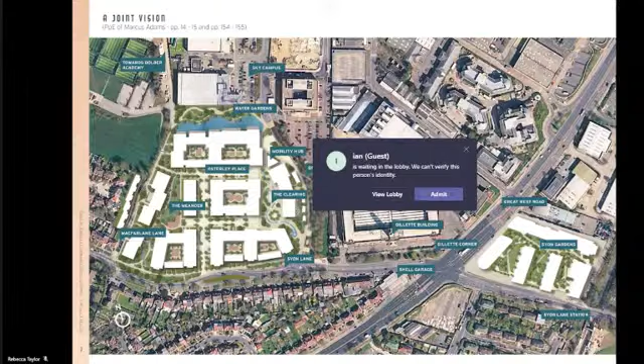I think it's in this slide where you can see the Homebase site outlined in blue and the Tesco site outlined in red. You can see its location. Rightly so, there's been much emphasis given to its relationship to Osterley Park in the northwest, and to Syon Park and Kew Gardens in the southeast. But what you will also see very clearly is the role of the Great West Corridor.

There's a real stark transformation from the finer grain homes to the west to the larger footprint buildings of the Great West Corridor to the north and northeast. That includes the Sky Campus, a significant area immediately to the north of the site, with over 7,500 employees, and the Bolder Academy, a recently opened school, again immediately to the north of the site. As we'll hear later, that area, the Great West Road, is part of the Great West Corridor Master Plan, an opportunity area providing 7,500 new homes and 14,000 new jobs.

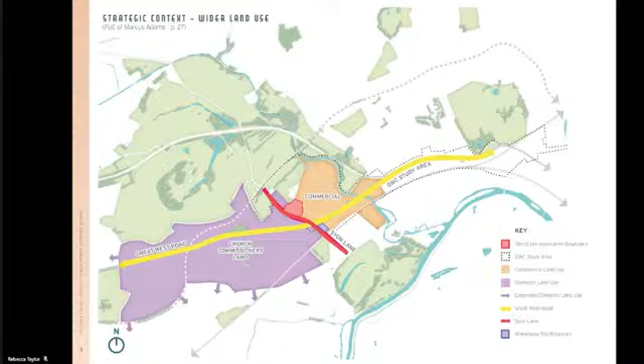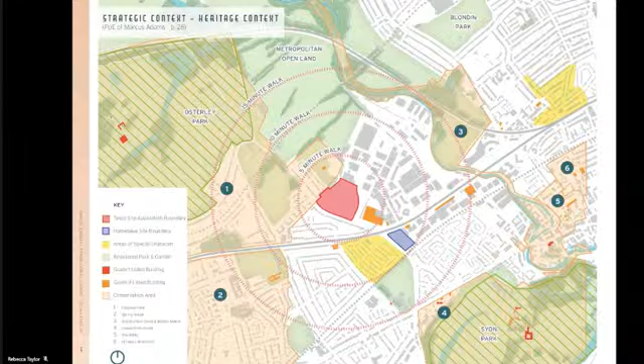Next one, please. As we zoom in, particular focus is on the four edges of the Tesco site: the northern edge to the Sky campus, the eastern edge to Grant Way, the southern edge to Syon Lane, and the western edge to McFarlane Lane and Oaklands Avenue. What's unique is that they're all very, very different relationships.

To the north, we have the Water Gardens, an area largely forgotten and hidden behind the rear of the Tesco store and the boundary of the Sky campus. To the east on Grant Way, we have a route that provides vehicular and pedestrian access from Syon Lane to the Sky campus, and ultimately for Sky employees going from Syon Lane station to the Sky campus.

It's a street that's quite green, with existing trees, not particularly overlooked, and very much a vehicle dominated environment, but that links you up to the Sky campus. On the northern side to the Water Gardens is a fence that runs along the northern boundary and the full extent of the western boundary to McFarlane Lane. That combination of fences on the north and west means connectivity between the metropolitan open land and open space to the northwest is a barrier to pedestrian movement between local facilities and assets.

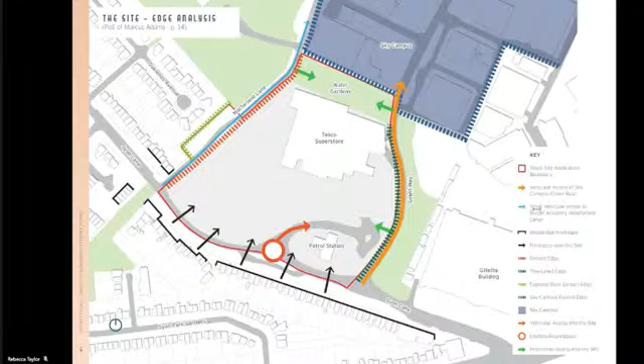I'll just move on now to some photographs - you'll see this on your site visit, but it's worth looking at these in context. The top left slide shows the Tesco store, a view looking north. You can see the Sky campus in the background there.

The next view, number 2, shows the vast area of surface car parking with the Tesco store to the left and the clock tower of the Gillette building on the skyline in the distance. The third view shows the car-dominated environment, with the petrol filling station to the right, which fronts onto Syon Lane.

Image 4 gives you that feeling of McFarlane Lane I talked about - the fenced-in route up to the Bolder Academy. To the right of that, number 5, shows the Water Gardens as they exist today, bordering onto the Sky campus.

Number 6 shows that view further along. We see the Water Gardens have real potential to make quite a special space as part of this plan, utilising what is currently another area of underutilised space.

Slide 7 shows the vehicle access into Grant Way, which is also used for pedestrians accessing the Sky Campus, and you can see some of the mature planting that exists on the left-hand side.

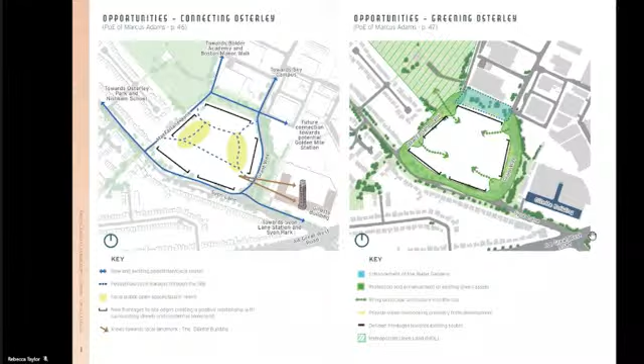And then the image on the right is about greening. As I said in the introduction, this project is not just about buildings, but about the spaces in between. The landscape-led approach started with this idea of a green halo, a green envelope to the scheme, linking up all the existing green assets, whether south on Syon Lane, the greenery on Grant Way, the water gardens, or McFarlane Lane and its link towards the MOL in the northwest corner. Combining that with the idea of pedestrian routes gives a green edge to this new neighbourhood.

In also dealing with constraints, there are a number, as you'd imagine on sites like this. The grey circles represent areas where height has to respect neighbours, and I'll explain how we do that - particularly along the boundary to McFarlane Lane, the area that sits within the conservation area, and backing onto Oaklands Drive, and the relationship to the south, to Syon Lane - those two particular areas, the south and the west.

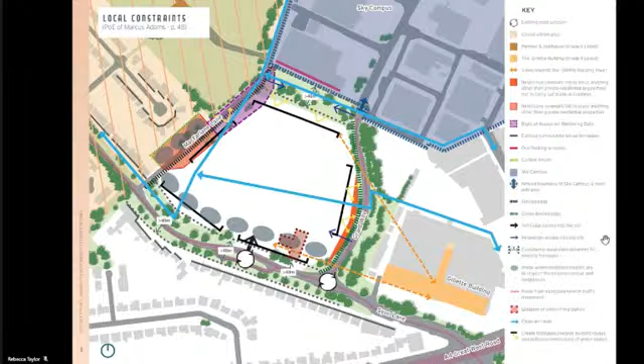We've also got the blue lines, which are the clean air routes as part of the wider connectivity of the Great West Corridor Master Plan. And we've got rights of access for retrieving balls, in the purple area in the northwest corner. So as you'd imagine on a site like this, a whole range of different constraints, and also the role of the Gillette building, particularly the clock tower, in providing legibility on that route from Sky Campus through to Syon Lane Station.

While focusing local, we also need, and we're fully aware as part of this design process, of the importance of strategic views, particularly from those wider heritage assets. This is an extract from the Great West Corridor Local Plan, November 2020, showing some of those views identified in that document.

Further, we agreed a whole range of LVIAs - actually these were agreed prior to our appointment, back in October 2019, with London Borough of Hounslow identifying a range of views to be considered as part of this application, particularly with reference to this Tesco site's relationship to Syon Park and to Osterley Park.

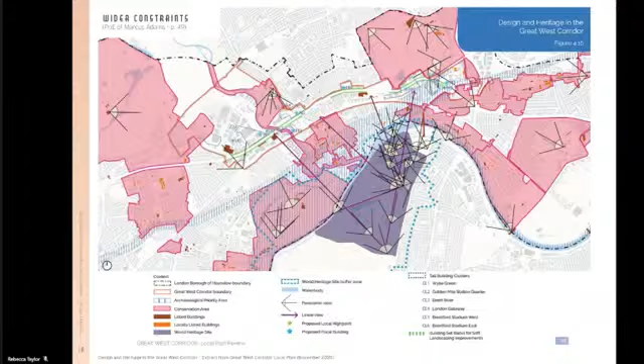For us, this project, in the creation of a new neighbourhood, is about placemaking - places that are people focused, that provide a quality place to live, and that's a driver for how we approach projects. So I'll take you quickly through this sequence of nine slides.

We start with number one, which is protecting and enhancing those local assets, and in particular we draw reference to the green perimeter and the water gardens.

In number two, we established the new connections - this idea of pedestrian routes coming in on the four corners, creating a network of streets, footways, and public realm that allows this new neighbourhood to knit and connect into its surroundings, utilising current opportunities and future-proofing for ones that may potentially occur.

We then created two new public spaces, which I'll describe further later - the clearing in red and the meander in green. We see this as a pedestrian dominated environment, limiting vehicle access to really the existing access to the south of Syon Lane, and generally our streets are green streets, walkable streets, with limited accessibility and servicing.

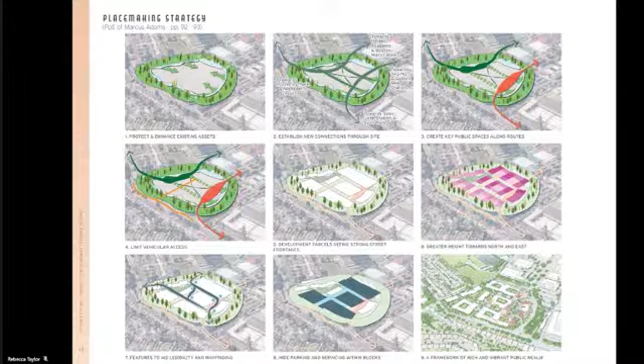I'll explain on the next slide, where you'll see the framework of what we imagine will be a vibrant and interesting public realm. Next slide, please.

This aerial view concentrates on the idea of the clearing. We've got our three public spaces: the clearing to the east, the water gardens to the north, and the meander to the west. We see the idea of this new space.

As I've described, it's on the pedestrian route from Sky Campus to Syon Lane Station and the neighbourhoods to the south, but also from the Bolder Academy in the north and northwest. These routes lead you to this new public space.

We heard in the introduction on Tuesday about the provision of local facilities and local uses, and here we've got the opportunity, as set out in our key, to provide a whole range of mixed uses, which could potentially include pharmacies, GPs, and community halls. We really see this as a neighbourhood, a local heart, a local hub, providing this range of mixed uses around a new public space orientated north-south, enabling great penetration of natural sunlight into that space.

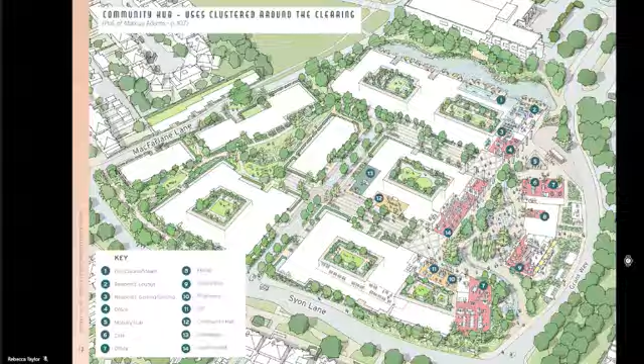Next slide, please. All that culminates in our illustrative master plan. This is one way that we've interpreted the parameters set out in the outline planning application, in the set of parameter plans, and also our interpretation of our design code.

You can see the combination of buildings defining the spaces. I'll draw your attention to a couple of things. The first is on Syon Lane, where you can see we've introduced houses, or in this case 3-storey townhouses lining the podium, which create a scale transition between the new neighbourhood and the homes on Syon Lane, which sit some 40 metres plus away from those frontages.

You'll also notice the small number of townhouses within the conservation area on the western boundary, where we've introduced buildings that provide a secure back-to-back relationship to the existing homes on Oaklands Avenue, with adequate separation distance. Those homes are 2-storey, unlike the 3-storey on Syon Lane, and the design code includes particular detail about how their amenity space effectively looks south-east, if there are any roof terraces in those buildings.

So particularly those two areas show how we deal with some of the more sensitive transitions. You'll also see the new alignment of MacFarlane Lane, now lined by buildings, so the route from Syon Lane up to the Bolder Academy will now have overlooking natural surveillance, as will Grant Way, the route up to the Sky campus.

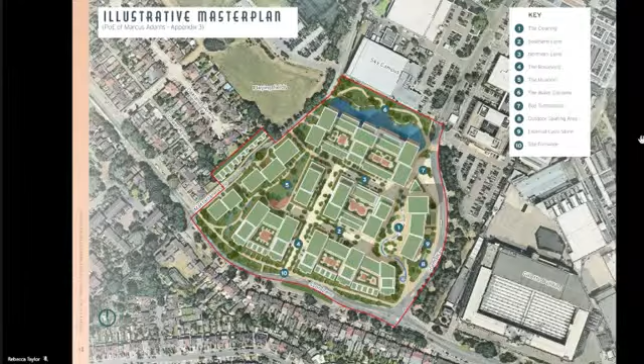As part of our illustrative scheme, we've interpreted it to show a vision of what this new place could look like. Obviously each phase has to come forward as a reserved matters application interpreting the design code. I think what we've worked carefully at in the design code is to identify those mandatory requirements — in that document, there are boxes in blue, making it very clear what the expectation is for each phase when they come forward.

This is an illustration of what the clearing might look like, the new mixed-use space, a combination of green and more hard landscape, with its north-south orientation giving good penetration of sunlight into that space. Overall, 45% of the site, as identified within that framework, within that skeleton, the parameter plan, is public realm.

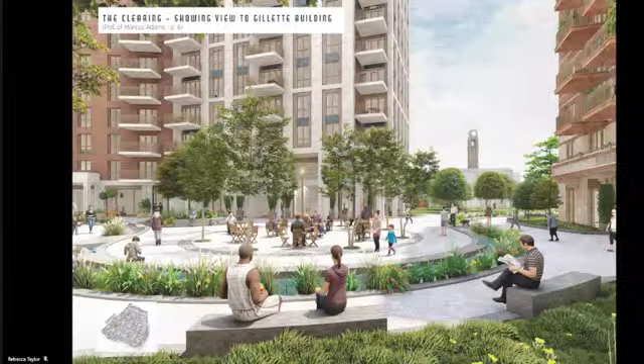In terms of those local views we've identified in the constraints, we've particularly aligned the lane, our east-west street running through the scheme, to frame that view of the clock tower for legibility reasons.

Another view, what it might feel like in the clearing. We feel there's the opportunity for a range of mixed uses here - thinking about the future of work post-COVID, home working or small WeWork type opportunities, local scale employment, as well as cafes, restaurants, community facilities and other supporting uses. Overall, there's 46,000 square feet of commercial space included within the development specification and the outline planning application.

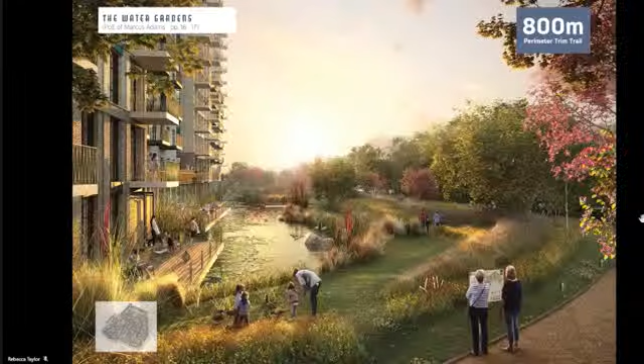This is the image of the water gardens, what it could be like. We imagine in its regenerated state a very natural landscape of wildflower meadows and water, part of our attenuation strategy, perhaps in contrast to the clearing, which we see as an area of activity and hubbub. The water gardens perhaps provide those areas of quieter respite and seclusion within the scheme.

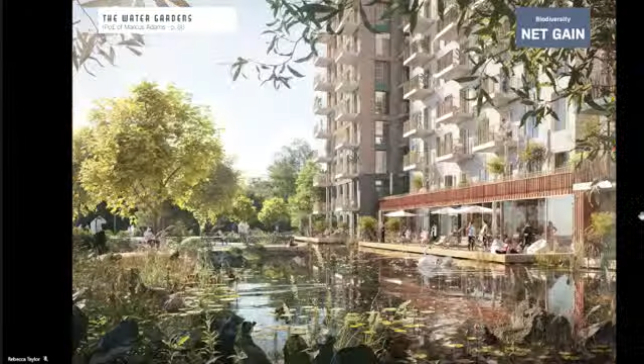Another view, this time of the water gardens looking to the east towards Grant Way, and the connection to Sky Campus. There's a real opportunity for biodiversity here - we're confident we'll achieve in excess of 10% biodiversity net gain as part of this project, and hopefully more as we get into the detail.

Our third space is called the Meander. We see this as much more of a natural space, again on a north-south orientation, with perhaps opportunities for children's play integrated within the more naturalistic landscape. Overall, we're planting over 300 trees as part of the proposal for the Tesco site.

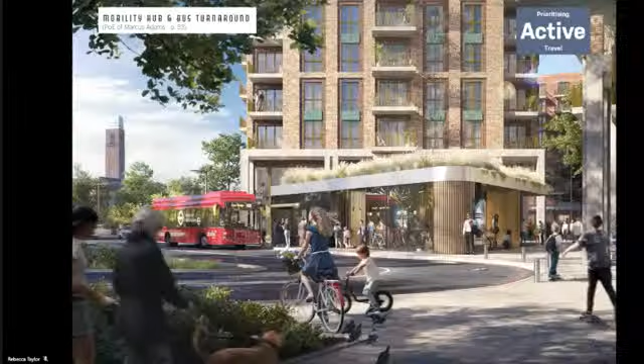This is to the north - the entrance on Grant Way to the Sky campus - looking south. The scheme and the parameter plans include the provision of a mobility hub and a bus turnaround. We also provide 2 options within the parameter plans for different bus routes to accommodate those services today, but also flexibility in the future. This mobility hub provides for a range of modes of transport.

Thank you. Next slide, please.

Onto the Syon Lane frontage - you can see here the 2 typologies that we propose front onto Syon Lane. First is the 3-storey townhouses that wrap the podium, which we believe provide a sensitive transition between the homes some 40 metres to the south across Syon Lane, with the retained verge, some retained trees, plus new tree planting. Then there's what we call the Syon Lane building typology, which is perpendicular to the street running north-south, with the height set at the height of the parapet to the Gillette building you can see further in the distance to the east.

So overall, we provide for 1,677 homes as part of this - sounds a very precise number - with 35% of that affordable.

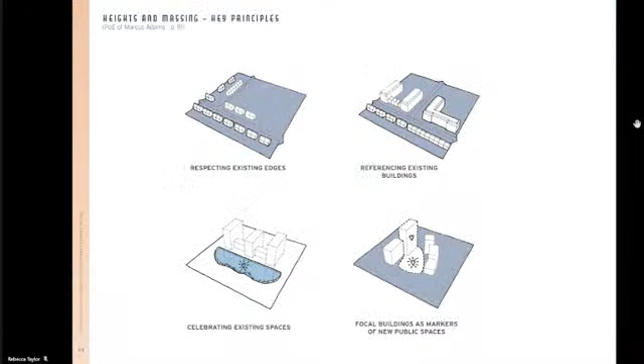Now onto heights and massing. We had some principles that we've applied: first, respecting the existing edges to the south and the west, where we brought lower scale buildings - this was the first move. Secondly, referencing the existing buildings, particularly the Gillette building on the Syon Lane frontage and the reference to the parapet there.

Thirdly, celebrating existing spaces, providing enclosure, perhaps the opportunity to optimise the site in the north and northeast, and then using focal buildings as markers to really provide that legibility to announce the presence of this new neighbourhood hub, this new neighbourhood focus, with buildings that perhaps just pop above the height of others on the skyline as markers to those new public spaces.

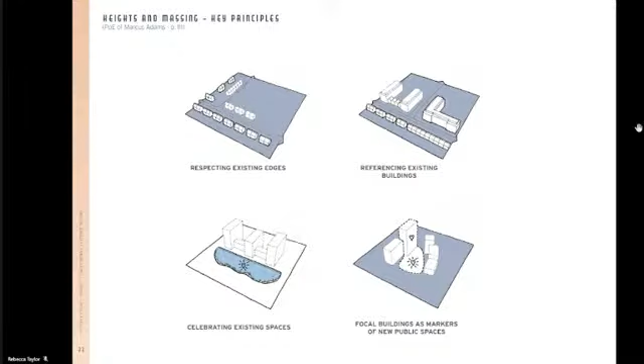Mr. Roberts will go into more detail on the classifications of those different play spaces and communal spaces for the London Plan and London Borough Hounslow. Next slide.

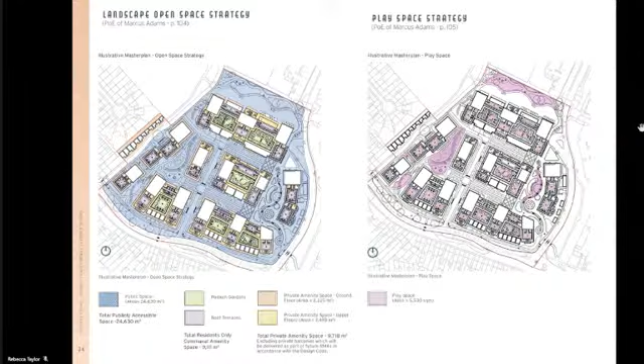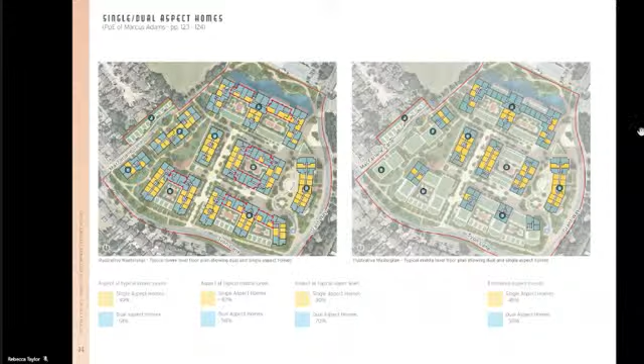Now we have got the opportunity in coming forward in future reserved matters applications to improve that, and my proof of evidence illustrates ways in which we can increase the number of dual aspect homes as part of future reserved matters to come forward in the future. Thank you. Next round.

It gives minimum dimensions for the width of the clearing and for the width of the meander, and other key distances, including relationship to Macfarlane Lane. I think all of these are set out in the parameter plans, but it was useful just to include one sample drawing to show the type of detail that's on those frameworks.

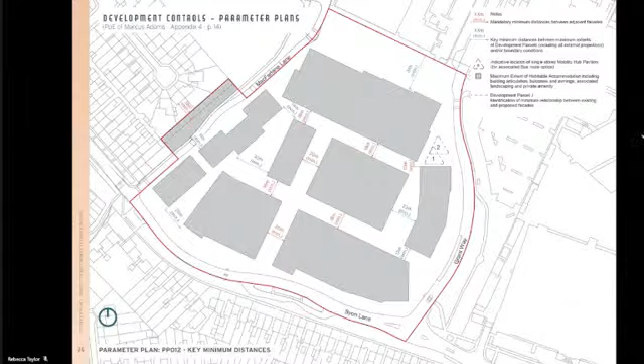Next slide. And then from the framework, we're then going into greater detail, setting out some of the envisaged building typologies and their materials. As I said in the introduction, you see the mandatory design principles in the blue box. We believe in making design codes very clear and very navigable, and then on the right hand side, how those mandatory principles have been interpreted as part of the illustrative work that we've done.

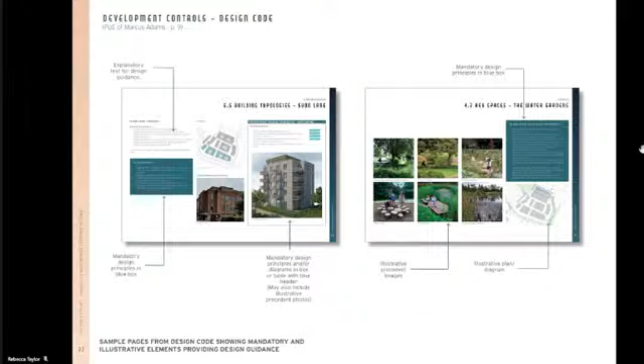So that's the left hand slide, and on the right hand side, setting out in detail the design of the new spaces, the type of tree species, the type of natural landscape, in this particular instance with reference to the water gardens. So the design code is there as part of the core documents, and I think it sets out hopefully how we will achieve high quality design as part of the delivery of this new neighbourhood. So thank you very much. Bye-bye.

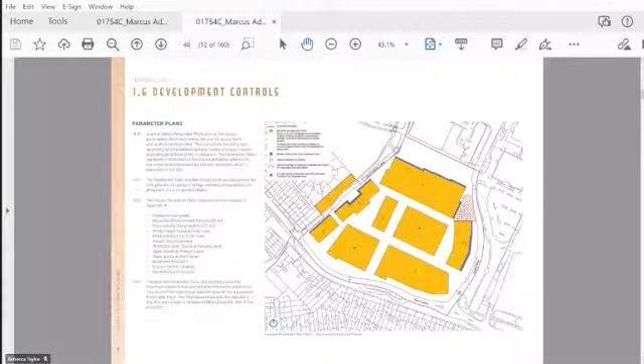Good morning, Mr. Adams. Could we have a look at your proof of evidence, please, on page 48? These clean air routes—I don't know whether it's possible to put that slide up about the clean air route. Page 48. Colleagues in the other room, any chance you could load page 48 up, please? Are you awake in the next room? Yeah, we're just finding it now. Okay, thank you. It was one of your early slides. Proof of evidence or? Yeah, proof of evidence. Yeah, page 48, Rebecca. Page 48, 3.9 constraints. Okay.

Yeah, so you've got these clean air routes marked there, and I'm particularly interested in the one that goes through the water garden and then further east, and it looks as if it goes down Harlequin Avenue. Can you tell me a little bit more about that? Is that a plan, an idea, a proposal, a firm proposal?

Okay, these are—the clean air routes is a concept that was included in the Great West Corridor Master Plan. So these are routes essentially through the proposed opportunity area. The one particularly that you raised, Harlequin Avenue, is part of, I think, hopefully a future aspiration and connectivity to the Great West Road. So I think what's happened as part of the iteration of this, some of those clean air routes on our proposal have slightly changed alignment. But overall this principle is that as part of the Tesco site coming forward, we create key pedestrian routes that link to these future clean air routes, or more sustainable routes to the Great West Corridor, potentially the new station, and so on. So these have emanated as part of that Great West Corridor Master Plan.

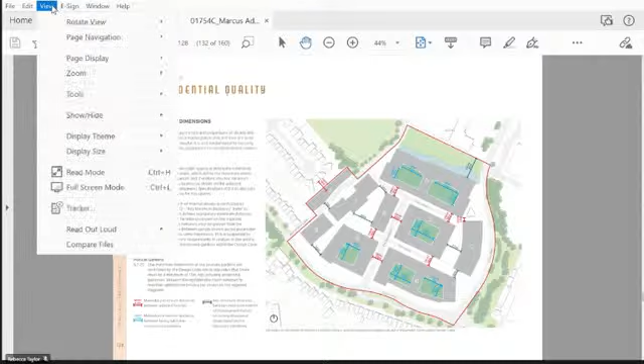Can we turn to page 128, where we're looking at the distances between the buildings? Is it possible to make that any bigger? So, am I correct in saying that the minimum distance between the buildings should be 18 metres?

Each side of public realm, which you can see in white, the east-west routes, the lanes, are 18 metres. The one running north-south is 20. Sorry, my question was, is it correct that the minimum should be 18 metres?

We've indicated 18 metres, 17 metres as you can see on this plan, as the minimum dimension across internal courtyards. No, I'm asking whether there is a policy or guideline that suggests distances between buildings shouldn't be less than 18 metres. I don't think there's anything specifically in Hounslow's policy which refers to 18 metres.

If we go back historically, there may have been an older policy in the Mayor's Housing SPG which referred to a yardstick, but it also came with the caveat that it shouldn't be applied rigidly and unnecessarily restrict density. Our view is that 17 metres is appropriate. So how many places are there here where the distance, you've put minimum 18 metres, so if we can stick to the 18 metres, how many locations is the distance actually less than 18 metres?

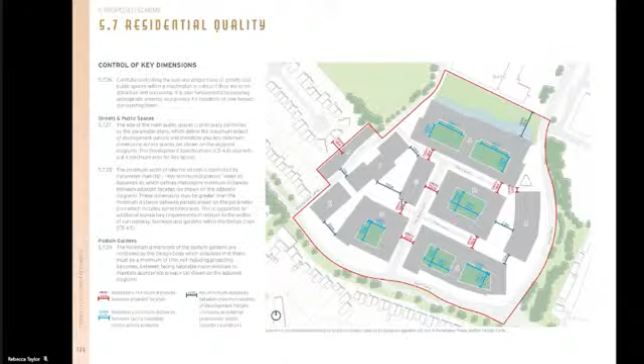Can we have a look at the garden areas, so the water garden, the meander, and the clearing? Now, on this particular diagram, it says that the water garden is 31 metres. And if we go back to page 48 of your proof, it says it's 40 metres. Which one is it?

Sorry, page 48, so the clean route map that we were looking at. Yeah, that's the existing dimension. On page 48 is the dimension across the existing space between the fence to Sky and the rear boundary of the Tesco store. The dimension which you've referred to as a minimum of 31 on the parameter plan drawing is the minimum dimension between essentially the red line boundary, which is the fence again, and the tightest distance across the water gardens to the balcony zone of the parameter plan.

So as you can see on building A, the building steps further away from the boundary the more you move westwards. So I think the dimension of 40 metres is taken pretty much roughly halfway across the space, which I would imagine equates to the dimension between the central section of building A and the boundary. So they probably look consistent. From memory, I think we follow that existing line of the water gardens in that central location.

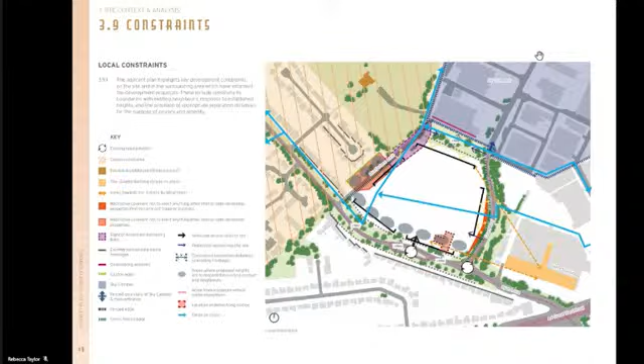So one's existing and one's proposed, Mr. Striak, is the simple answer to the question. Right, so do I assume then that building A will be further north and more into the water garden than the current Tesco store, the back wall of the Tesco store? No, because it's the boundary at the back of the Tesco store onto the water garden, which is the line we defined. And actually, you'll notice on the parameters, the block parameters, the water garden actually gets wider.

It actually gets wider as it moves further westwards. So that 31 is a minimum dimension to the balcony zone on that maximum parameter. Okay, so I think it would have been useful to have the dimensions at either end there, so that we could be clear what it actually is, because we haven't got consistency across these two diagrams.

Okay, all right. If I can please take you to the second design review panel report from the 28th of January 2021, which is CD 4.11. Yes. Right, and if we have a look, yeah, it's a shame that the pages weren't numbered and the paragraphs weren't numbered, but if we look in the middle of page 2, Heart of Osterley.

Yes, we've got that. So halfway down it says, if I can read it, the open spaces are too small for the scale of the scheme, and the size of both the meander and the clearing feel minor in comparison to the height and bulk of buildings. Although the design of the meander has improved significantly, its triangular form suggests it might be difficult to inhabit when you consider the amount of people that will use it. We are concerned it will become a passing through place and not somewhere for people to pause and dwell.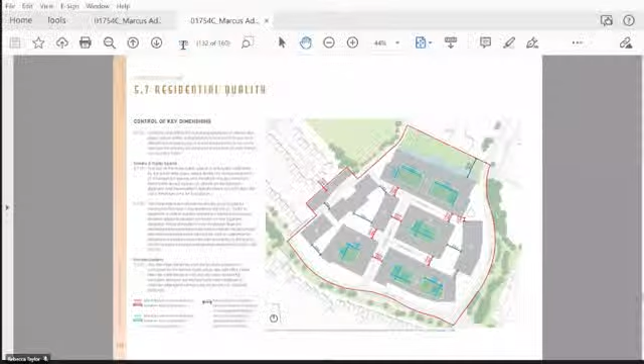Okay, all right, thank you. There's one other comment I wanted to make, and I don't know what page it's on in your proof of evidence, but there's a photograph of the Adini building. Let me just check which page that was on. I think it's on page 43. Yes, page 43. Yes, and I'm just looking to see if there is a reference there. Hold on, this is 891. I think it's 3.6.15.

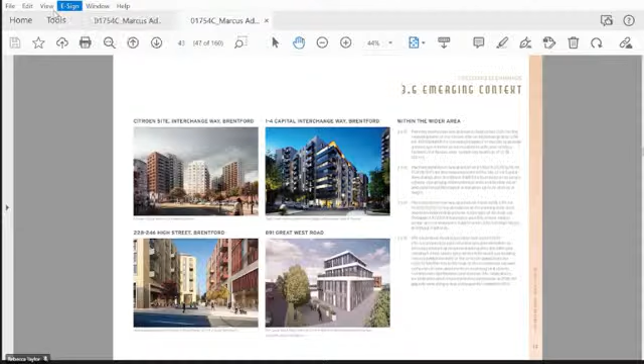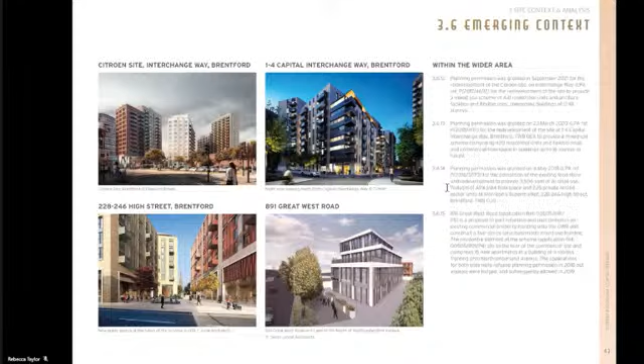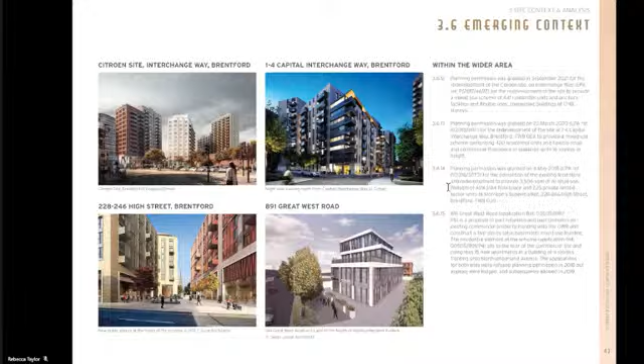I don't know if you're aware of the fact that this is not the building that was approved. Right, okay, and I think you need to have a look at that, because this is not the design that was approved. I think maybe we could check that. Okay, I think we need to just double check. Obviously there's a reference here to a particular application which this reflects. I talked about it at the bottom of the appeal. I'm sorry, I can refer this to Mr. Roberts in the roundtable on the planning. If there's an inaccuracy, I apologise. We thought, with the best of intentions, that this was correct, but we can check that. There was a last minute change to that, and that needs to be corrected.

Okay, thank you. What was the change? The Art Deco frontage was maintained in the building as a result of our discussions with the Adini. So it does look very different to that building there.

Okay, thank you. Have we got any further questions? So my colleague here, Mrs. Szokalska, has got some further questions. My name is Olga Szokalska, resident of Northumberland Avenue.

You're very faint. I can't hear at all, actually. We can't hear you. Can you turn the sound up? Isn't it a matter of policy, London plan? We can't hear you. Document, London Plan policy D4, delivering good design.